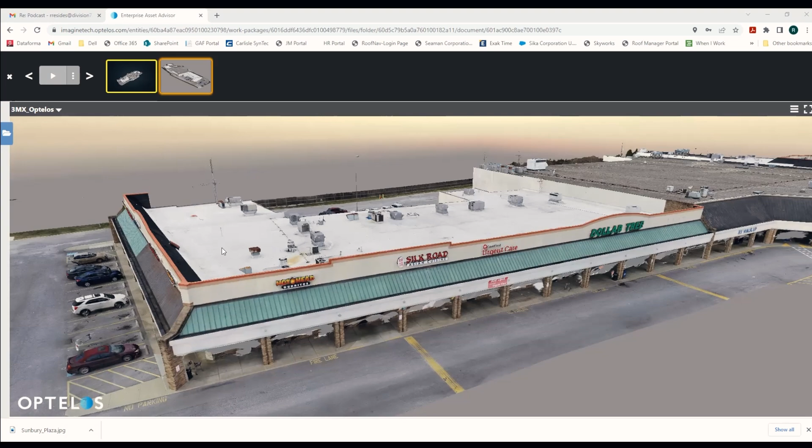And this is a great example of a model that we used for estimating and selling, and we continue to use. Matter of fact, this property manager in particular faces some challenging tenants sometimes who want to put things through their roof when they're not supposed to.

So we just talked a little bit about documenting the conditions. Well, one thing we like to do is in a yearly assessment, we will redocument, right? And that allows them the opportunity to look back on that historical data to see what has changed. Did somebody put something on the roof without authorization from us? Is that going to affect our asset in a negative manner from a valuation standpoint?

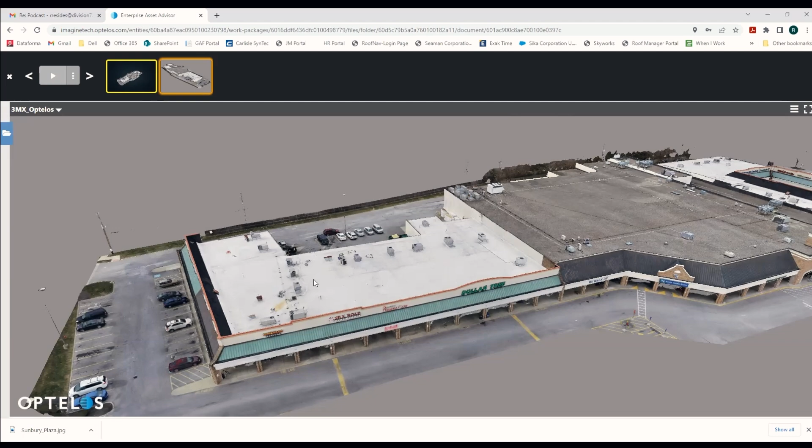These are large buildings, they're pretty expensive, needless to say. So the guarding of these assets and making sure that they're making money is a very high priority to these people. So we are looking at this model in all its glory, and you can see from a roofing perspective, I'm going to drill down on just this side so we can concentrate on a few things.

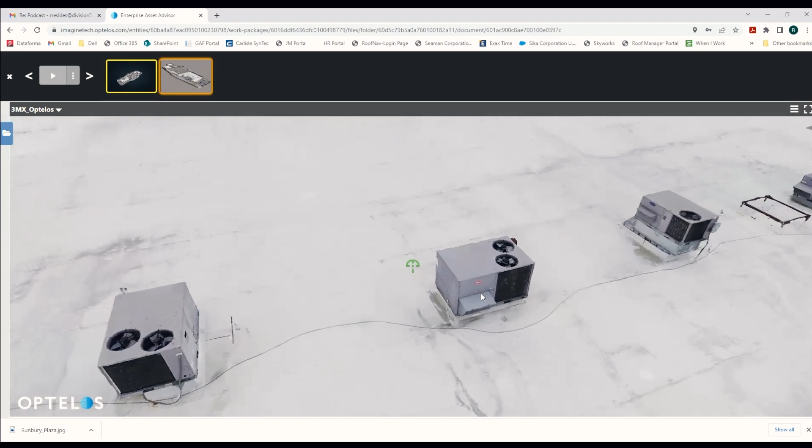And you know what, Ryan, really quick, would you say that Optelos is probably the best 3D mesh generator that you've seen to date? Yeah, absolutely. So we've tried a few different products in our early stages, and I wouldn't say any of them are bad per se, but when we started giving our raw data to Optelos and they were kicking back the imagery products, we noticed that our point clouds were much more dense and the meshes came out much more clean with the same amount of photos. So that was a pretty impressive thing to find out.

So needless to say, once we noticed that and some of the other features that I'll show here in a moment, it was really a no-brainer for us to jump on board, and we haven't looked back since.

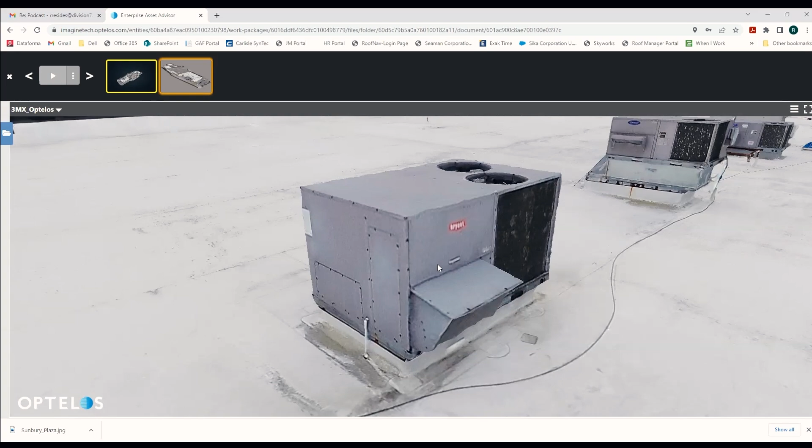So one more quick question. You guys mentioned the annual checkups. Does that mean these types of jobs for drone pilots are almost like a recurring revenue job? If they take on a particular project, will they go out there 3 times? What does the recurring revenue model look like for these pilots?

Yeah, great question, Paul. So in a re-roofing scenario, a company like ours, very concerned with quality, we want a flight before we estimate. We want a flight each week while we're putting the roof on, and then a flight at the end of the job, that final job shot we talked about.

So depending on the scope of work and the size of the building, that project could run a week. We just did a building that was 800,000 square feet, and it took us upwards of 5 months to pull off.

Oh wow, so imagine the weekly flights involved in that. But even though there's some money involved, trust me when I say the building value and the value of the roofing project itself is well worth the expense to a commercial contracting company to get that data in their hands.

Gotcha. Some of the things we just talked about, safety, documenting to make sure we have proof of what we performed and that it was done correctly along the way, and at the end when it was signed off by the building owner, by the manufacturer, when we get that warranty in hand. So absolutely, recurring revenue there.

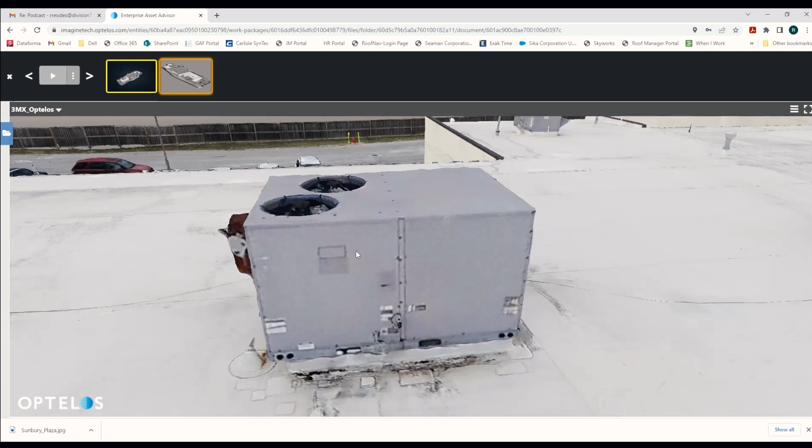On a maintenance perspective, most roofs are going to be a once-a-year type deal, but you can imagine if you have a contractor that you get friendly with, and they have customers like we do, where they are multi-facility owners. These property managers can sometimes have a portfolio of 5 or 6 buildings, and there may be 5 or 6 property managers within that company.

And then sky's the limit. There are huge publicly traded companies out there that one may be able to engage on drone imagery and flying their buildings, and they own thousands of properties across the country or across the world. So the potential is huge.

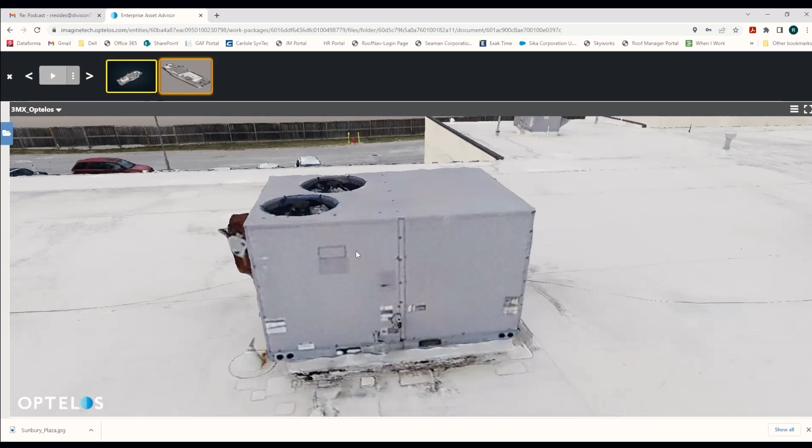I think the key is learning a few things from our podcast here and learning to speak the language and the lingo a little bit, to be able to drive that value to contractors who are not familiar with drone imagery and the models and the maps, because that's really where you're going to be able to take your drone business to the next step.

And I've got 2 questions for you before you continue showing the value of this model, which I appreciate the switch tracking because sometimes it's hard. But we've talked about a lot of different types of value that these drones provide.

And one of them you've brought up doesn't make sense to me, which is OSHA. I thought we solved all problems with OSHA with either burritos or donuts.

Okay, now that we've got that question out of the way, question number 2. So obviously what pilots get paid is going to be dependent on the size of the building. I know you guys hire a lot of pilots. For other roofing contractors, and for drone pilots, what is a pay range that you have seen or had experience with, before you continue going into the dollarized value here? Because I want to hit this subject again at the end of the show.

Yeah, absolutely. John, do you want to talk about that a little bit? Yeah, so for full time, if you're a DSP, you understand the imagery, you understand how to utilize the data and acquire it, the opportunity to obtain a full-time employment scenario with a contractor is very high.

Contractors are going to be able to hire you, use you every day, all year long. Contractors doing 5 million, 10 million, 15 million, 20 million and up are doing enough work to keep a person busy every day as an employee. And if that suits people out there who want that 401k, want the health insurance, want all that, and get out of the freelance world, that is a very wide open market for you.

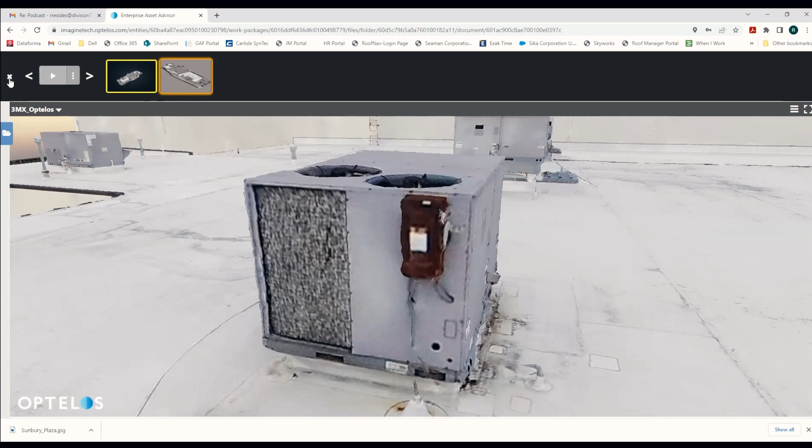Awesome, well Ryan, keep showing us all the ways you utilize this data to make better decisions, because I think a lot of us are really interested in that. And I apologize for slowing us down on that front.

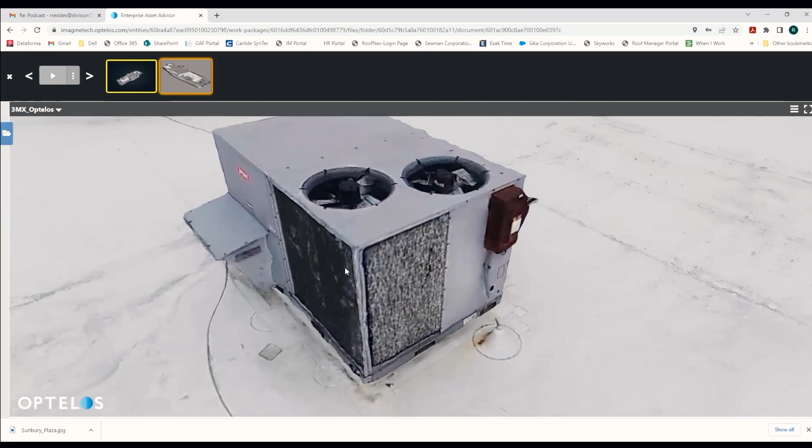No, it's completely okay, there's a lot to unpack here, Paul. It's really a revolution for our industry, and we're super excited to share our story and what we've done alongside you and Rob to bring some of this to other people.

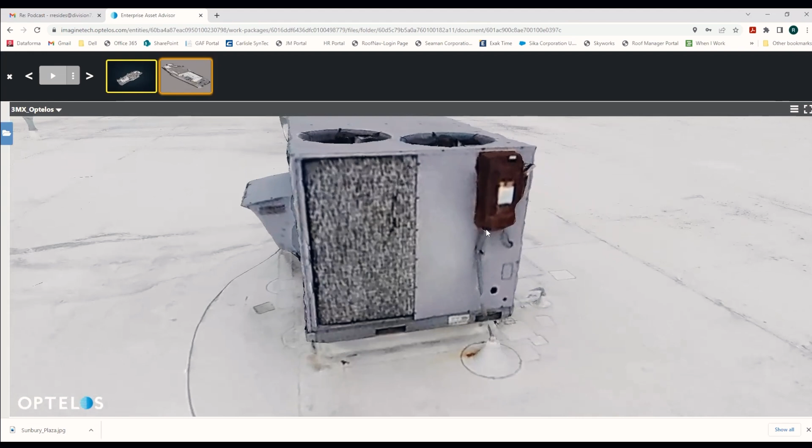So right here, I want to show something that came to mind as I was rotating around this unit. Down here on the bottom right-hand corner, you'll see an electrical conduit that comes up through the roof with what we call a pipe boot on it. One thing I want to say quickly, in the old school days when I would get a picture, it would be from this angle, and I don't know why, but people always tend to miss the small things. Well guess what, if I'm estimating a re-roof, that just costs me money, just because they happen to be on the wrong side of the unit.

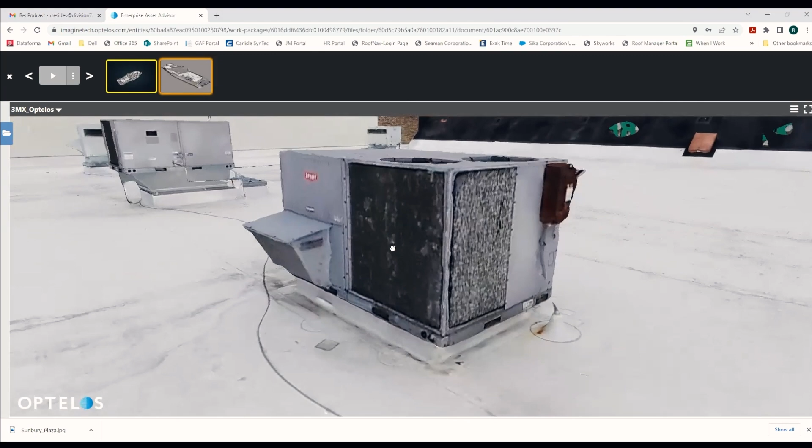But here, not that big a deal, because I can rotate this unit around. I can see the electrical conduit coming up through there. I can see there's likely a gas line penetration coming through here. And on that other side, that was a condensate line coming out, which in the summertime when the AC is on, that's going to be dumping water out, right? That can cause us problems when we're trying to install a roof if there's water coming out the side of a unit, especially in the waterproofing industry.

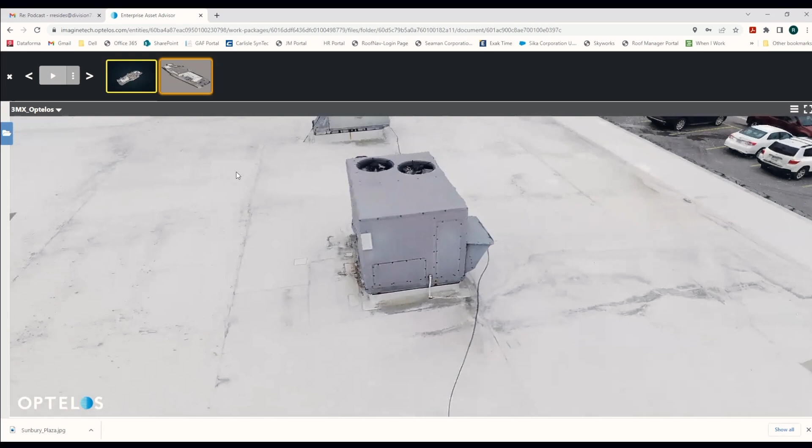So little tidbit there, but on a much bigger scale, let's look at this measurement-wise. You people out there are going to know a lot more about drone operations than I will, but I know enough to be dangerous at times. We know the accuracy of the model is based on the GSD. The way we typically fly, we're accurate typically within a half inch or so of real world measurements. I typically tell clients it's an inch, just for safety measures.

So when we get on larger buildings, the traditional ways of measuring have been a wheel, which can fail - we've seen it happen many times over the years. And then there's measuring tapes, there's a lot of human error in there, and John and you both spoke to that earlier. So when we're dealing with something that doesn't have emotions, doesn't have bad days, never blinks, and I can anticipate about an inch accuracy, the larger the building grows, the more value that takes on. If I was dealing with a building that was 1,600 feet long and I was off a foot, that's a lot of extra money I either added or missed within a project, causing trouble whether we don't win a project, or whether we do win it and take that cost on the chin because we weren't accurate enough.

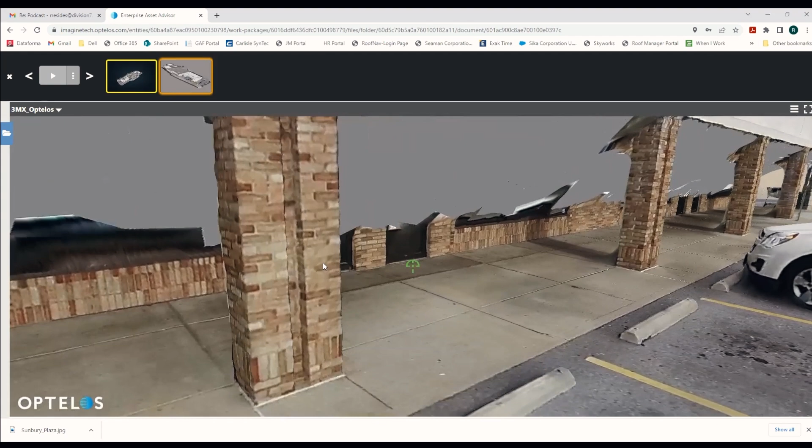From a planning perspective and a pavement perspective, outside the building envelope, even though we weren't trying to capture much of that stuff, there's still more to provide to building owners when we look at other large capital expenditures like parking lots. We can tell if there's cracks in the parking lots, what the paint looks like, the parking blocks, the masonry on the outside of the building - a lot of different things that really compose the bulk of expenditures from a building owner's perspective. So that's a little bit on the models themselves, on a 3D mesh.

So if we flick over to a point cloud real quick, this is where some of the really cool forensic tools come into play. Just to clarify something regarding accuracy, that's relative accuracy for taking linear measurements, area measurements, and maybe even volume measurements. It's not necessarily absolute accuracy, like i.e. your roof is in the right place in the world down to an inch.

Because to clarify, in teaching drone pilots to make these maps and models, they're not even using GCPs or georeferencing whatsoever, correct? That is correct, Paul. Great point on that one.

So from a contractor's perspective, at least in the roofing industry, I'm not really too concerned about anything near survey grade accuracy or absolute accuracy. I just need to know that the measurements I pull on my project are correct. So if the building itself is plotted a little off from where it is on the earth, that's not a big deal. What would be a big deal is if I pull a measurement and that's off.

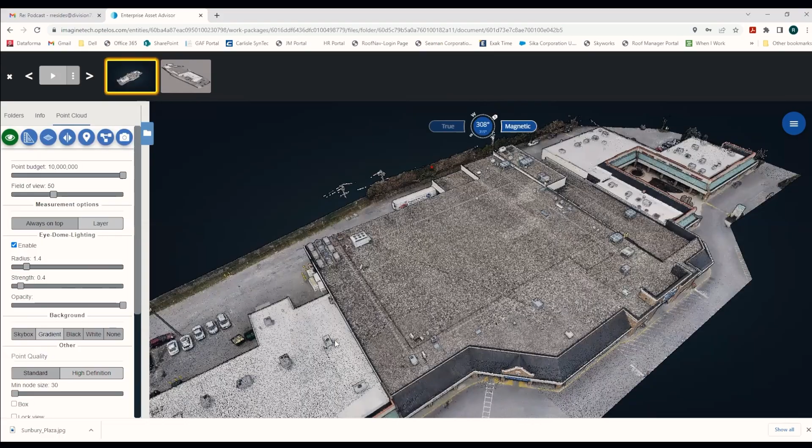I appreciate it too, because for those drone pilots out there, that makes these jobs a lot more scalable when you don't have to take all the time to georeference stuff. It's also valuable because so many surveying boards are trying to go after everyone for laws that are 100 years old and really irrelevant at this point, which showcases that surveying is all about plot lines, legal boundaries, and whatnot. You're simply taking measurements to put a safer roof to keep people healthy in this building, and that has nothing to do with surveying. So it's better for you, better for a drone pilot, all in all better. So just wanted to clarify. Thank you, because this is a really cool data product.

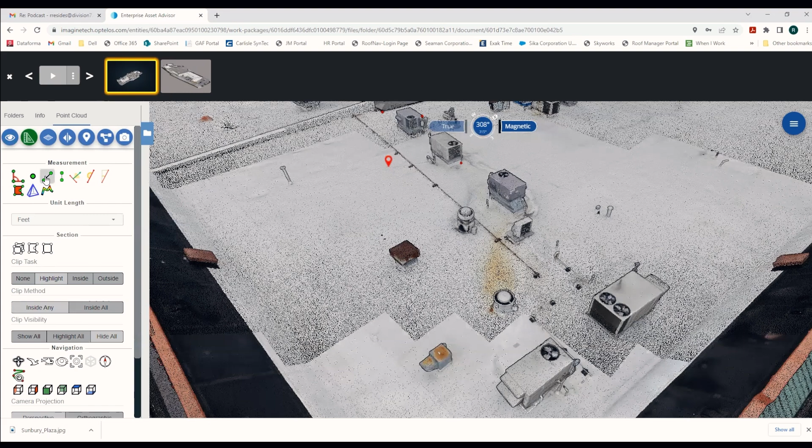So within the point cloud itself here, Paul, we get these forensic tools we talked about a moment ago. Over here on the left-hand column, we can open up some of these tools, and pretty much anything you can think to measure is within here. So we have distance measurements, and we have height measurements, which is only the vertical separation between two points in space.

Knowing the height of the roof is a very good thing when we're trying to design them. Wind patterns change the higher you get up. We need to know, for let's say we're ordering downspout, off the back edge of that gutter, from the pavement or the in-ground drain up to the bottom edge of that gutter, how much downspout do I need there? And maybe we need to know - we had a project with a pretty high roof on it, and there was a question if our crane would be able to sit where the customer allowed us and be able to set the products up on the roof.

Now, the old school way of doing that was our superintendent and I would have to drive out to the job site, and he would make me walk up the stairs because I'm the less senior person with the tape measure, and I would toss down that 300-foot tape and we would just have to manually measure that angle to see if we have enough crane stick to get it up there. We're talking about hours of investment here.

Well, guess what? Because we had already flown that project and had our point cloud ready to go, when he asked that question, all I did is I brought up the model, pulled a distance measurement, and found that we had plenty of arm on the crane to do what we needed to do. So right there, a utilization of the point cloud which saved us hundreds of dollars. And that actually happened to be an out-of-town job about 3 hours away. So every time we had a question or a double check as to what the size or distance or area or volume of things was, it was seconds away.

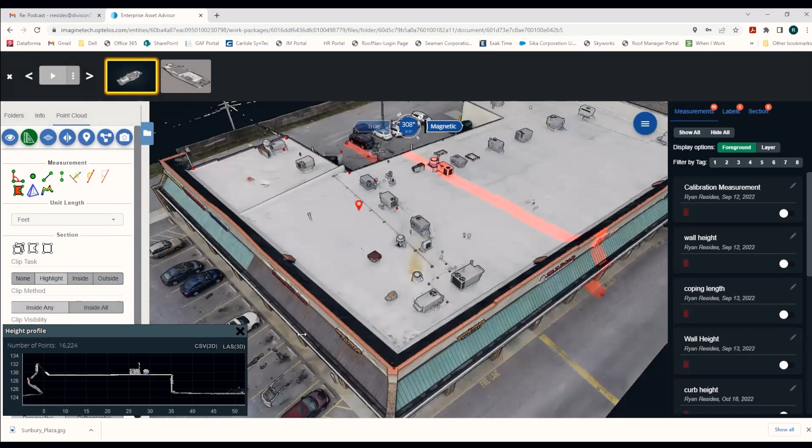I'm going to enlarge this box here real quick, just so we can all see it a little more clearly.

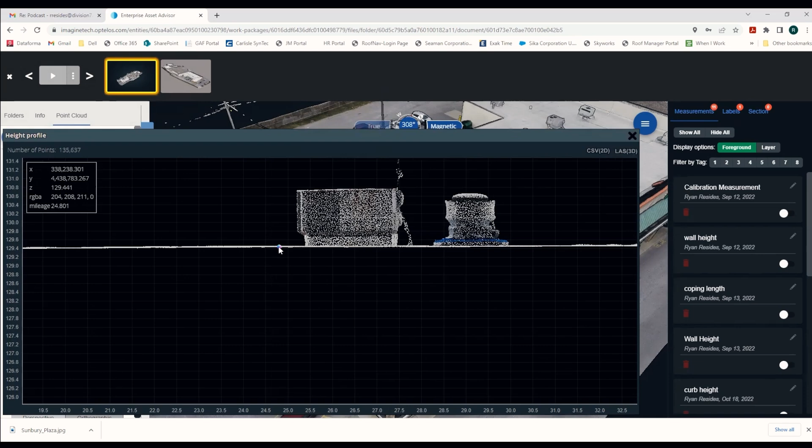This particular property, we didn't really have any drainage issues on, but there are plenty of scenarios where they are. You can see I can come through here and it's showing me all the coordinates on an X, Y, and Z basis of what's going on. We actually have an altitude measurement over on the left-hand side and other axis information on the bottom. I can drag through here and see the exact points within this model of what's going on.

So if there was a scenario where I had a suspected deflection in the structure or the deck, I come in, I take this elevation cut, and I can see exactly yes, there is a low spot there, or no, there's not. Now it's not going to tell me why that is there, but it's an amazing forensic tool for us to begin that journey of figuring out why the water is sitting there and how we're going to answer the question of how to get it to flow properly.

So this is a tool I haven't seen anyone else out there have or use before.

Yeah, 100%. Well, let me ask you the elephant in the room question, because it's very relevant to what we're talking about right now. I've had a lot of roofing contractors say, well, I just fly thermal drones, right? And a thermal drone may or may not show you where there's water below the impermeable layer.

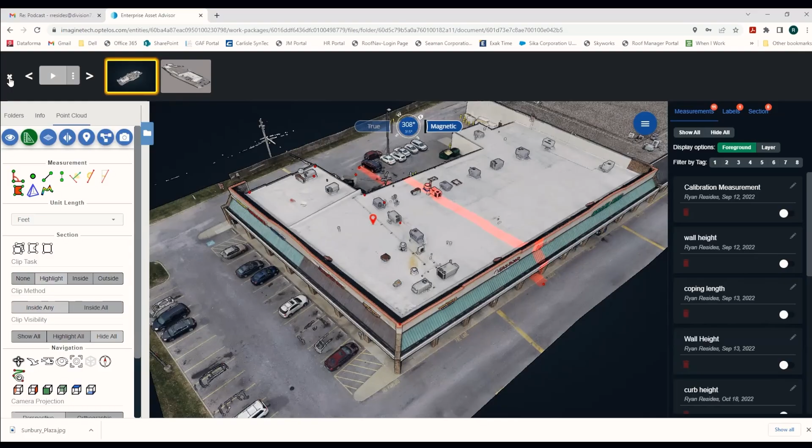That's a good question, Paul. I would say that from a general operations standpoint of a roofing company, if I had to choose one, I would go with the visible spectrum over the thermal, just because it applies to more situations on a daily basis than a thermal one would.

Now, my complete opinion on the matter is that you need to do both in the long run. It's another tool in the tool belt. We at Division 7 like to speak from a fact-based perspective, so whether that's measurements or thermal anomalies, we want to have the data on that. That's something within different work packages within Optelos, whether it be service or a re-roofing perspective.

Oftentimes, if there are questions as to the moisture content that may or may not be in a roof, we go ahead and send the thermal drone up, and maybe a little bit before that, when it's still light enough out, we're going to get out there and fly the visible spectrum.

And that allows us, a lot of times we can do an ortho compare within Optelos. So I can actually bring up a thermal ortho and I can bring up the visible spectrum ortho, and I have a slider in the middle of the screen and I can pull that back and forth to see, okay, I'm seeing some kind of anomaly here. Is there something in the visible spectrum that looks off that we may need to go back and evaluate a little bit further, helping confirm or deny those anomalies from the thermal spectrum?

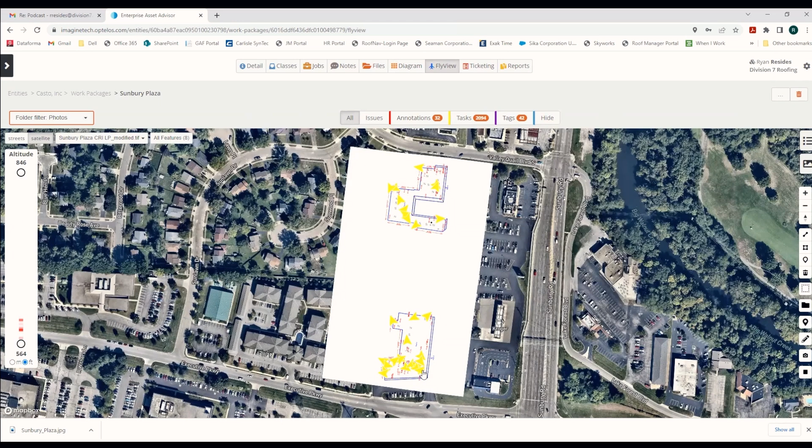And interestingly enough, this one actually, we took some roof drawings that we did in a roofing software program and geolocated them right in our Optelos program because we were curious to be able to take some service assessment codes and map them over top of the roof that we did an ortho on. Another thing that we have going on here, let me switch to a regular ortho.

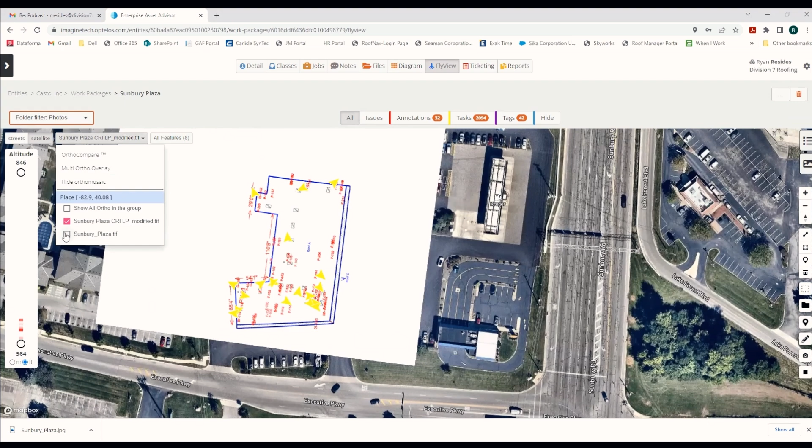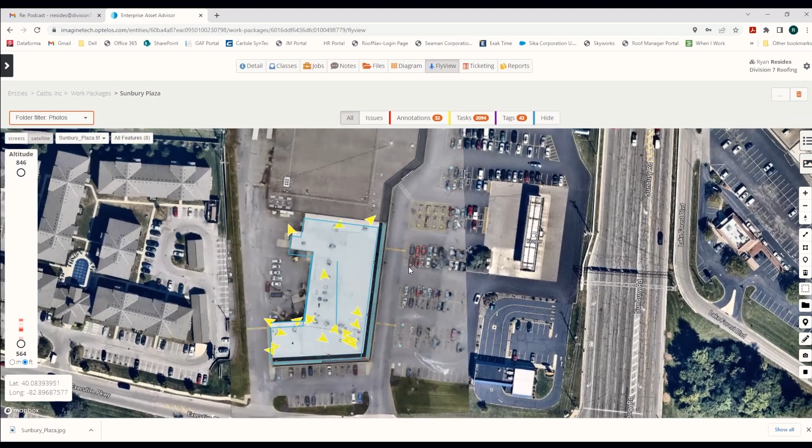Talking about that perspective, right? So any phone or drone photograph that has GPS information is going to plot here on the fly view. Each one of these little triangles is actually a photo that was taken, and it's telling me the X and Y axis of where that photo was taken.

It's also showing me the direction the camera is pointed in. I can click on any of these triangles and pull it up, bringing it up in full screen that quickly to take a closer look. This comes in handy because there's a balance in modeling between how high end the resolution is and how long it takes us to fly. So a lot of times we choose middle grade.

Every once in a while there'll be a detail where I need a little more clarification. So rather than spending more time flying, trying to get the resolution up on the model, we always send boots up on the roof. They're going to still take pictures with their cell phone, or sometimes we can seek clarity in a single drone image. For example, we can plot all of our nadir shots in that pattern, and I can come in here and say, oh yeah, I need a little clarification on that unit right there. So I just grab onto that.

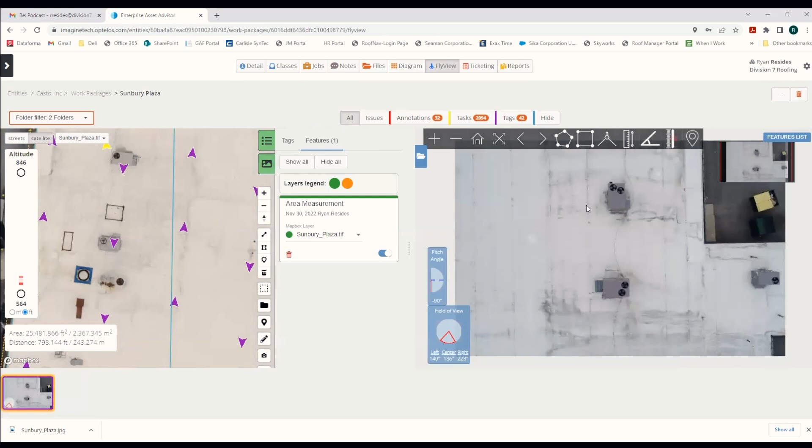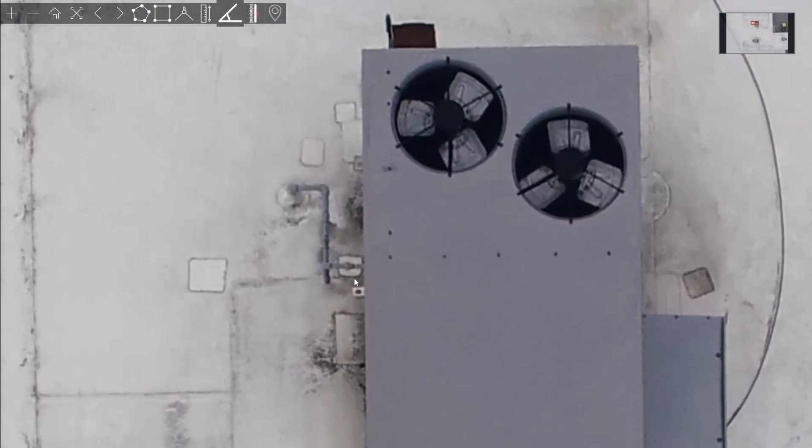This one was done with a Phantom 4 Pro, so we get to bring in that 4K imagery. Remember before we looked at the model and could kind of see that pipe boot, but there wasn't much going on — the gas line didn't materialize within the model. But yes, I can confirm quite quickly there is a gas line there. Here's what's going on, and there's a lot of patches around there too, if we were looking from a service perspective.

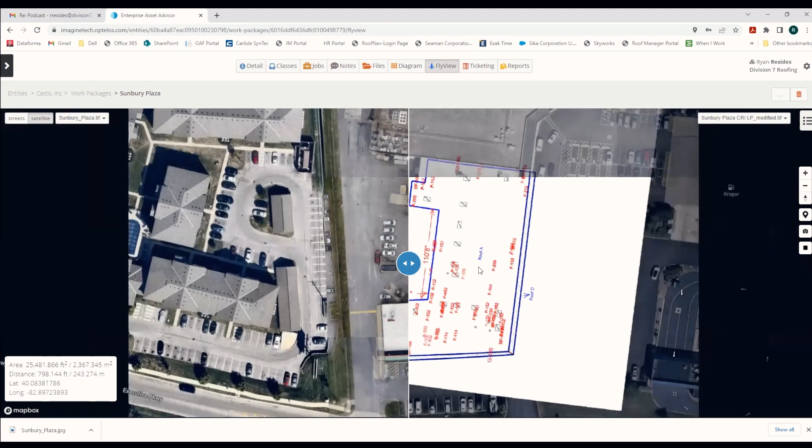So really, the fluent nature of Optelos, whether we're trying to look at 2D maps, 3D models, plotting individual photos or other pieces of information on them, it's going to be able to do it all. The last thing I wanted to do — I talked about that ortho compare. And here you have it, friends. This is an actual ortho mosaic with a roof drawing.

We've even, in new construction scenarios, plotted blueprints right alongside of our orthos to be able to see, hey, how's this project coming along? Is it looking good? Are the details being done as they should be per the plans?

Lots of different questions being asked here, but you can also imagine maybe I had a thermal map on the right — I can zoom in and see, oh, there's a thermal anomaly. Same kind of scenario here: I have this unit sitting right here, and we could tell on our inspection that we had quite a few issue codes going on around here. So it allows me as an inspector to draw back into that visible spectrum very easily and start to diagnose what's going on.

In this scenario, I'm zoomed in as far as I can on my ortho. What I would do is bring up some of those individual drone photos. In this particular model we had both nadir shots, oblique shots, and orbits, so I have plenty of things to choose from to see if there are things pointing to some of these issue codes that were out there.

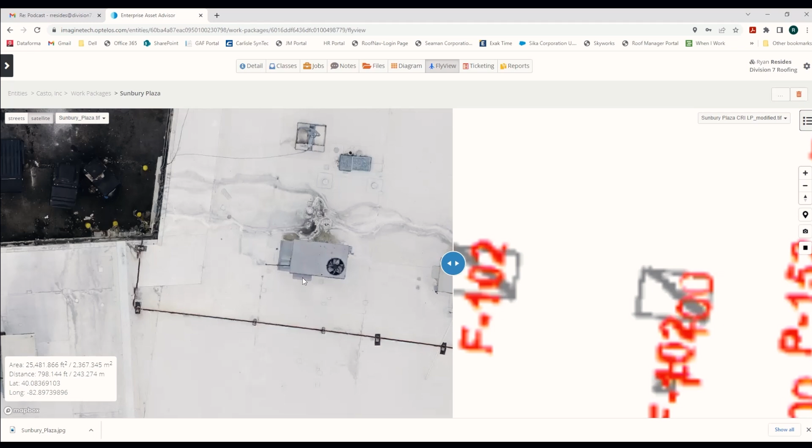So I can estimate, I can direct my team, we can close this sale, and move on to the next thing.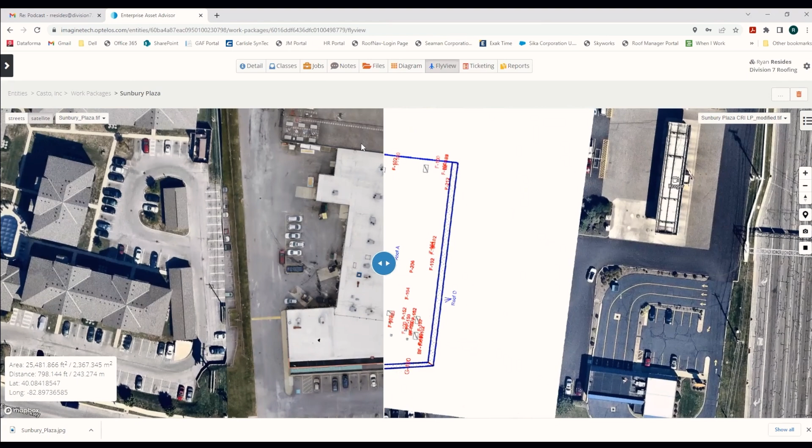One of my jobs, Paul, here is when Ryan does these great presentations, is to say, hey Ryan, show him the Kmart job, show him this job, show him that job. So to the DSPs out there, the folks that are going to try to work on the roofing contractor and tell them what they can provide, when we're talking about these frequent weekly progress flights and how that looks visually for the contractor to do a time lapse of progression.

In Optelos there is a great ortho overlay time lapse that we can show in a very fluent method to prove or disprove activity throughout the project. So I just want to sometimes give Ryan a chance to drink some water, chill his jets a second, and let me ask you to show off something else, Ryan. Thanks, John, I forget to breathe sometimes, man. I get so pumped up about this.

So, all right, where were we? Multi Ortho overlay. Yeah, the Multi Ortho overlay.

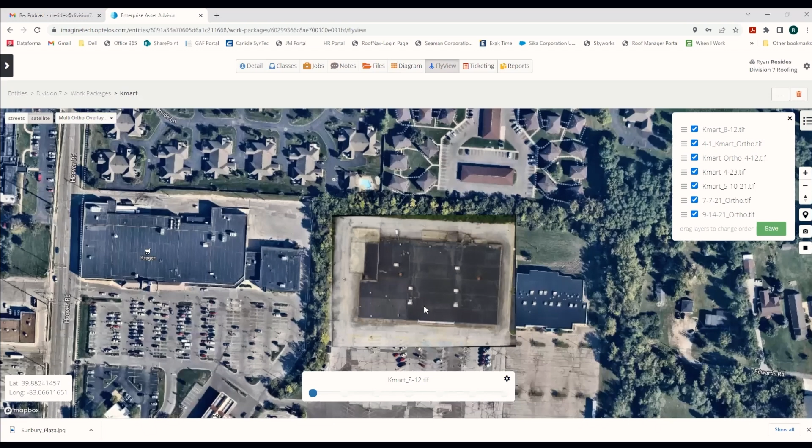This is really valuable for disaster assessment, emergency response, construction, and insurance adjustments. This is one feature I've been wanting from Pix4D for 5 years now. They have something similar on their cloud service, but you have to pay extra on top of your original service, and it's not as robust. If you ever need to do what Amazon does for their distribution warehouses, they have an ortho for every single week. This is a perfect example of how Optelos is superior to other photogrammetric engines on the deliverable side.

This makes it so much easier for you to do your job and sell your value. So Ryan, continue, but this is a really powerful feature for a lot of people, and this class may be a lot more pertinent than just roofing inspection. I wanted to get that out there because I think it's important.

Just as John is pumping you up, I want to pump you up even more. I'm going to have to take my jacket off, I'm getting warm over here. Get me all excited.

Sun's out, guns out. The Multi Ortho overlay. So as John said, this was a Kmart that was shut down years ago. Somebody purchased it and decided they wanted to gut this building, complete remodel down to the bones, and turn it into 3 separate tenant spaces. So we had an opportunity, because they were doing that, to tear the roof off completely before we laid a single sheet of roofing, which in our industry is a big no-no.

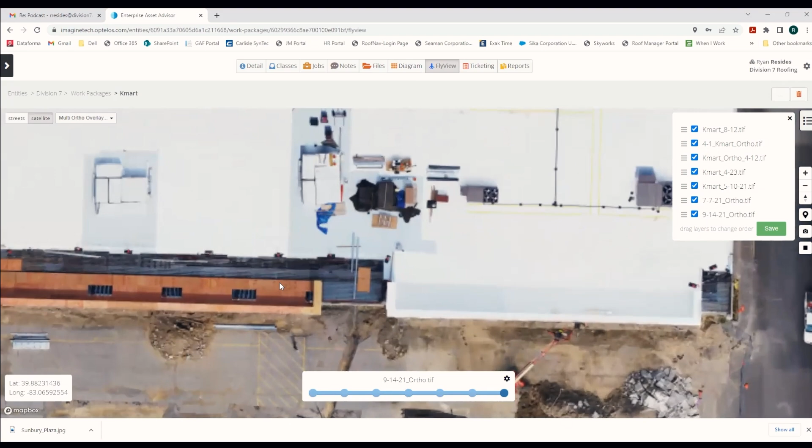On the right side of the screen, I still have the ability to do pin drops to draw attention to certain things. I have linear measurements, I have area measurements. So we still have tools, even though we are quickly able to flick back and forth between those views to show that time lapse, to tell the story.

Even if it's not a single project, we talked previously about building owners. Can you imagine the value if you were flying somebody's building 2 times a year, 1 time a year, and you held that client for 5 years, the amount of data and the story you could tell as a contractor, or a DSP who's getting that information to a contractor to sell things. Oftentimes it's tough in our industry to sell things because people don't get up on their roofs. We're selling them stuff blind, and oftentimes they come with very big price tags.

When we're able to show somebody not only what's going on now, but cycle back through a number of these maps and show them over the course of 5 or 10 years, like, look what's happening over time, and they see the degradation with their own eyes, there's no denying it. You're building that trust, and that relational sale is the ultimate form of sales because you truly have a relationship. You're showing them with their own eyes what you're talking about and how you arrived at the conclusion to charge them this price for this service.

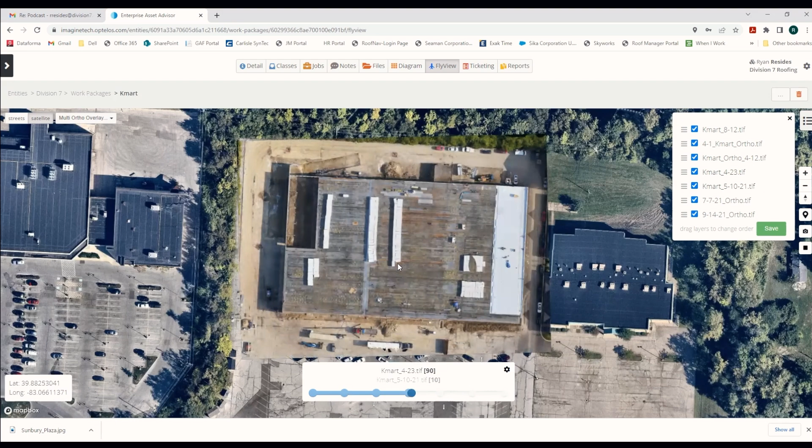Talk about charging people prices, Ryan. If you go back a couple slides to maybe the center, right there, if you zoom in on this imagery you see the steel deck that we replaced. There's something in our industry called change orders, that means extra work beyond the original agreed upon sum. You can see where we had to replace the structural steel deck.

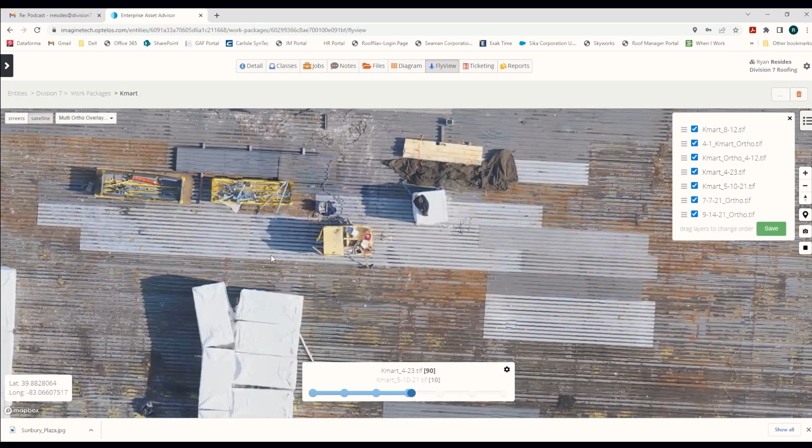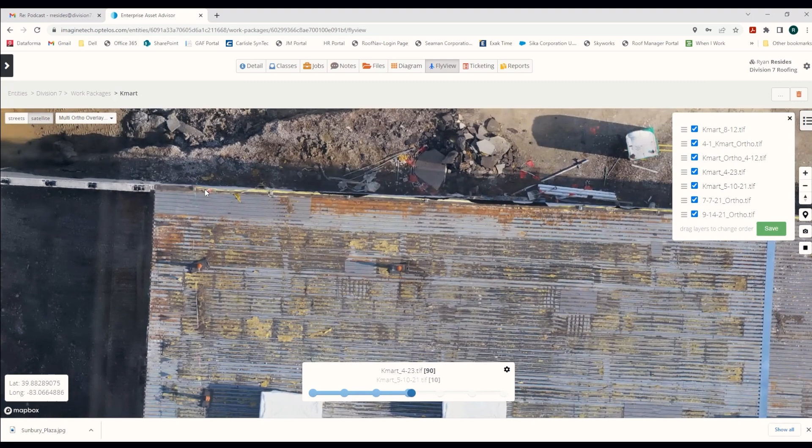When we go to find the general contractor's representative to approve this extra work, it's strange how you can never find these guys. Then you submit your invoice for this change order, where they said over the phone, yeah, just fix it, and all of a sudden they get amnesia. So we're able to bring this imagery up and say, look, here's our steel deck we replaced. Do you see it? Are you going to agree to pay us, or are we going to have to take our roof back off?

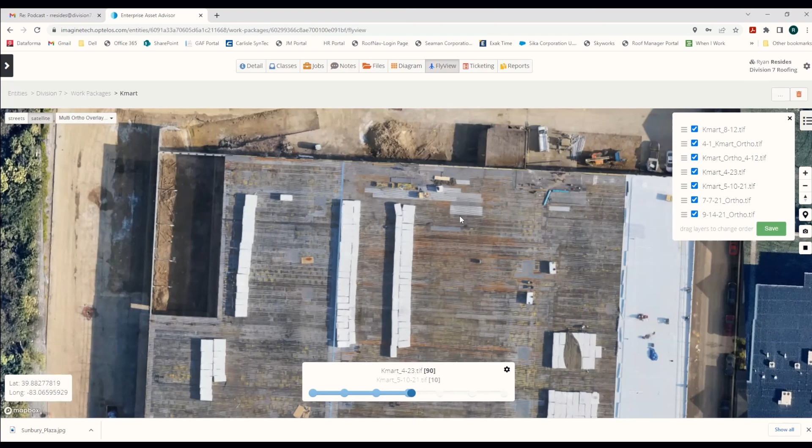So yeah Paul, that's a few of the tools. We've only touched the tip of the iceberg, but that's really some of the pertinent stuff we use from a visual and measurement standpoint to quantify things on a daily basis. But the reporting tools, the ticketing tools, if you need a little help assigning jobs and getting them completed, you can actually use this as a job site scheduler for your drone activity.

If you wanted to, there's checklist functionality within Optelos. We are very big on checklists, and I think you'll agree with that when we fly drones, so we aren't forgetting things. We can store all those within the system and look back to see if something went wrong or right. Did you work your way through your pre-flight checklist before this thing happened? It says here you checked the box on this day at this time, and then this happened.

So there's a lot of robustness around Optelos, the sky's the limit, frankly. They've built so many features into this thing, it's almost ridiculous, but we continue to find ways to implement these tools within our operations.

So it's amazing. I think the one last thing to show people is how this transcribes into your estimating software. Now I know this might be something drone pilots don't necessarily do, but even pilots could use this to show other contractors the value in general, because as Ryan's saying, it's not just 3 or 5 pieces of value, there's dozens of points of value.

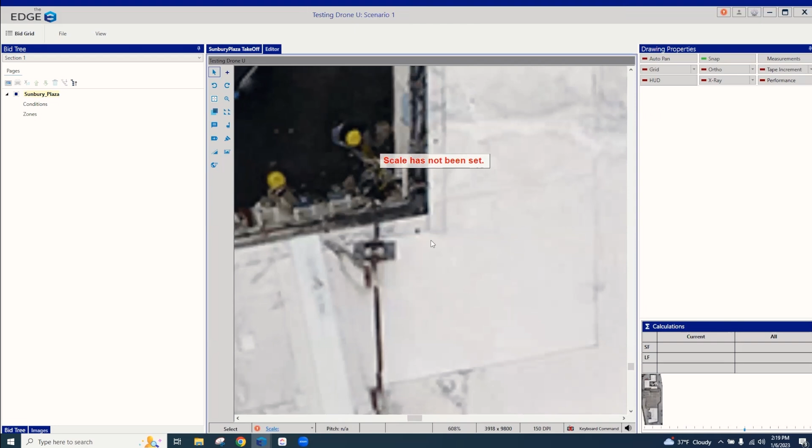So now, instead of having that go on, I come in here and you can see I'm just going to keep zooming. But even when I'm at a super high zoom level, even in a reduced file size, we're holding on to that resolution pretty well. And I can pinpoint the edges of these buildings, the edges of penetrations, and I know that I'm within an inch of accuracy of the real world. So it really makes things more accurate.

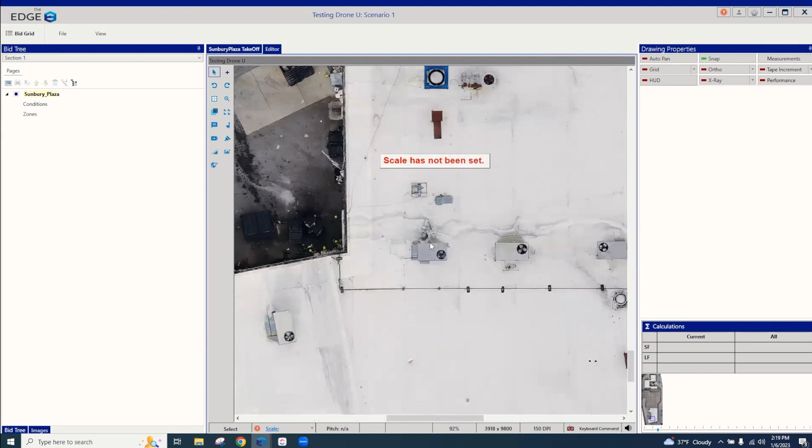It takes me less time because not every time do I actually even need to flick over into Optelos to look at my 3D mesh or my point cloud. I've got clear enough imagery that I can start to see things right within the Edge digitizer to know, hey, it's a curb, oh this is gas lines.

Let me tell you, if you're on a ballasted roof, which for the non-roofers out there means it's a roof with all the rocks on top, and it's got old gas lines, they are very tough to see from a Google Earth image. Not anymore. I see them clear as day. Even when there's a dark background, a dark pipe, they pop out.

Well, and that answers an important question from roofing contractors: can I just do this from Google Earth? And it's like, no. According to the Department of Homeland Security, satellite imagery cannot be sold on the private market with a GSD less than 25 centimeters, which is enormous. If you think about what is an inch, 2.54 centimeters, we're doing literally almost 10 times that. So you're lucky if you have a foot per pixel, which you can't take measurements when one pixel equals a foot, and you're seeing that image interpolation between pixels and whatnot.

So yeah, absolutely. Really, the only thing that saved people previously was the Edge program. You're simply calibrating what that line segment is, and then hopefully, if you need to remeasure that particular line segment, you're hitting the same points again.